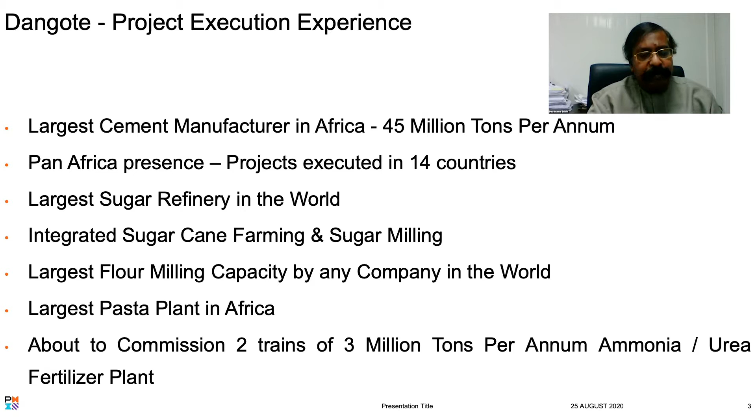Coming to the specific project in question, we are looking at the oil and gas projects we are executing at present, specifically the petroleum refinery. It is the largest single train petroleum refinery in the world with a capacity of 650,000 barrels per day, with an integrated petrochemical complex to produce 840,000 tons per annum of polypropylene. And we are already doing the initial conceptual work to add another 500,000 tons per annum of polyethylene.

In the same complex, we are also building the second largest ammonia urea fertilizer plant in the world with a capacity of 3 million tons per annum. The complex has an integrated power generation capacity of 555 megawatts, with 120 megawatts dedicated to the fertilizer end and the balance dedicated to the refinery.

This site is also going to be the terminal point for the largest subsea gas pipeline infrastructure in the world, with a length of 1,100 kilometers of subsea pipelines gathering gas up to 3 billion standard cubic feet of gas per day, and it terminates at the site with world-scale gas treatment plants.

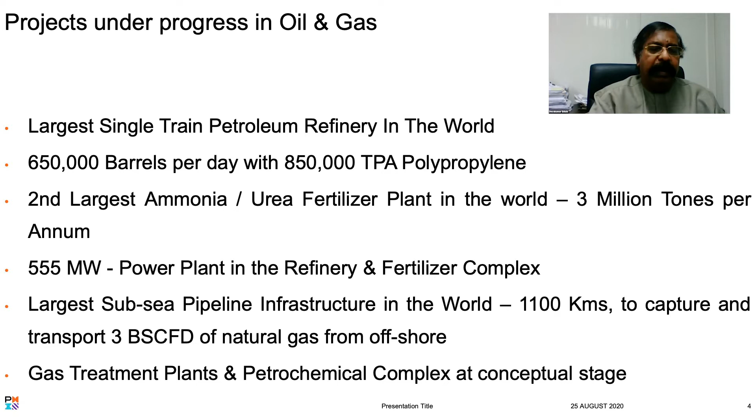So the project site comprises three key elements: the petroleum refinery and petrochemical complex, the gas treatment stations for 3 BCF of gas coming from the 1,100 kilometer subsea gas pipeline, and a 3 million ton per annum capacity integrated ammonia urea plant. For today's attention, our focus is primarily going to be on the petroleum refinery and the petrochemical complex.

I'll start with the business strategy of this project. The first strategy was that we should focus on producing the best quality product in the world so we can export the products to anywhere. So we straight away designed the refinery to produce Euro 5 quality products, so this product can be sold anywhere in Europe, US, any part of the world.

As you know, many refineries, even in Europe, are still not in a position to produce fully Euro 5 grade. So we have gone straight away to produce Euro 5 grade for 100% of our production, whether it's gasoline, diesel, or aviation jet, all Euro 5 grade. That was the first business strategy, so we will not be constrained to move the product to any part of the world to export, because it's a very large refinery, and we'll have to export quite a lot of our production outside the continent.

The second strategy was to have crude flexibility. Yes, the refinery is coming up in Nigeria, and Nigeria is a large oil producer, so normally the refineries would be tuned to utilize the Nigerian crude oil production. But we decided that being major investments, we should not again be constrained by the crude.

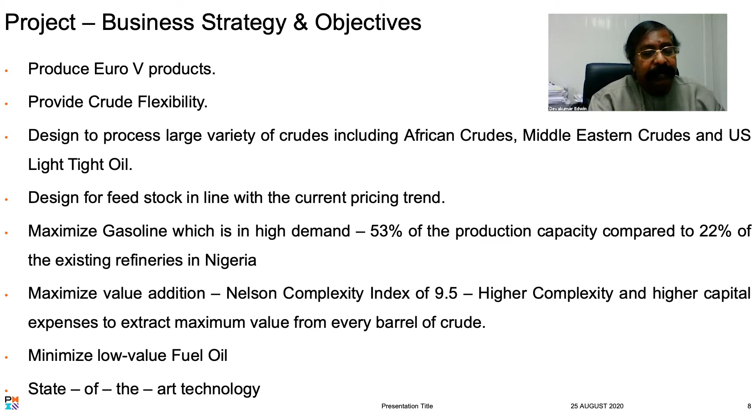And to give an executive summary about the refinery, we can meet 100% of the Nigerian requirements. In terms of all requirements, gasoline, diesel, aviation jet, kerosene, we can meet 100% of the requirements. And we will have surplus in each of these products for export. And as far as Nigeria is concerned, it creates an $11 billion per annum market for the Nigerian crude.

For Nigeria, US used to be the biggest market for the Nigerian crude. Then, as I explained earlier, US became self-sufficient. It started exporting a similar variety of crude. So Nigeria lost its biggest customer and market, and it was facing competition from LTO. US has already sent cargoes to India, which is another market for Nigerian crude. So the demand for the Nigerian crude was also facing a lot of pressure.

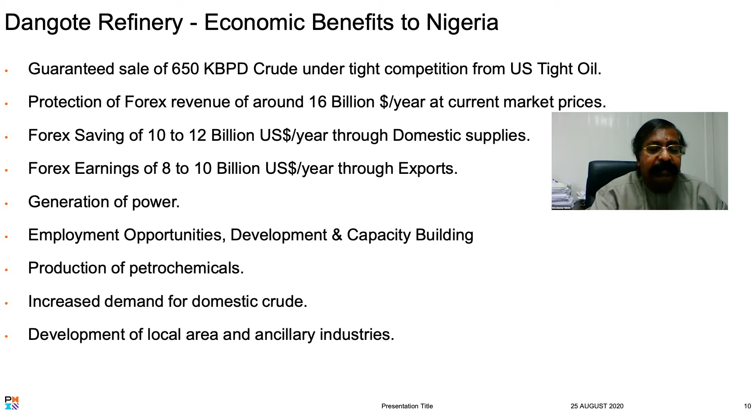So now it creates a ready market with huge potential. And apart from consuming a substantial quantity of Nigerian crude, because we are going to export a huge volume of liquid products, and because we are going to go for 100% import substitution, there is going to be an enormous foreign exchange savings for the country. It will be a minimum of almost $10 billion, if not more.

So the country is going to benefit a lot in terms of foreign exchange savings, and the currency, which has always been sliding down, can become stronger.

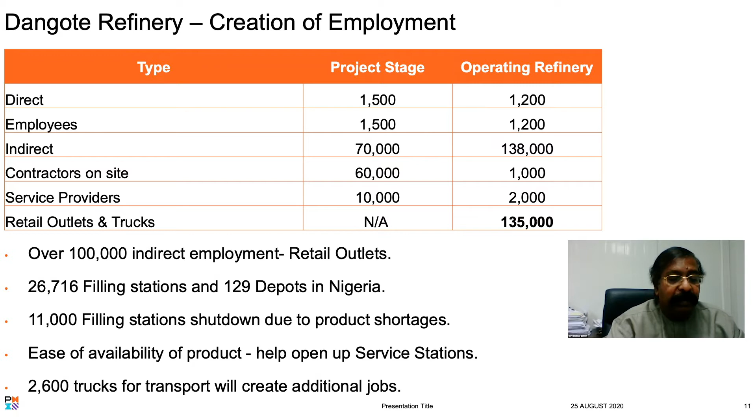And we have also designed marine infrastructure to receive the crude and to export the product. That was another part of the business strategy, you can say.

75% of our production can be evacuated through road, and 75% through sea. So we have 150% evacuation capacity with full flexibility, and we can take it to ports within Nigeria, West Africa, Central Africa, and to South America and Europe. So we have full flexibility in product evacuation.

I'll place a slide now to show you the production capacity for each product: gasoline, kerosene, jet, and diesel, and what is the consumption in Nigeria, and what is the surplus for exports. So this gives you a picture of the refinery's capacity as well as the quantum of products available for export.

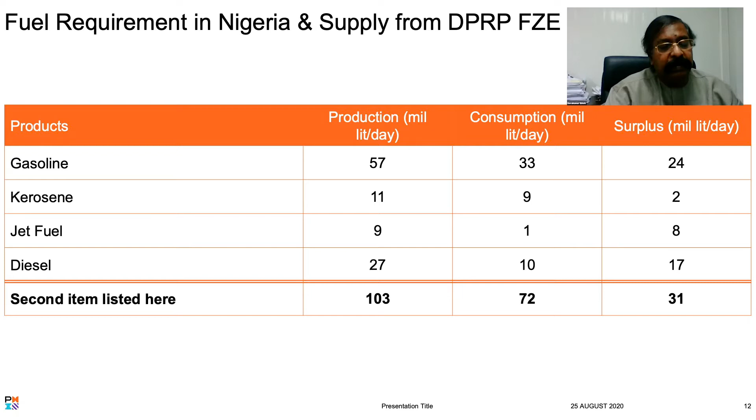And if you go through the next slide, you will see the various petrochemicals which this refinery is going to produce: polypropylene, polyethylene, carbon black feedstock, and sulfur.

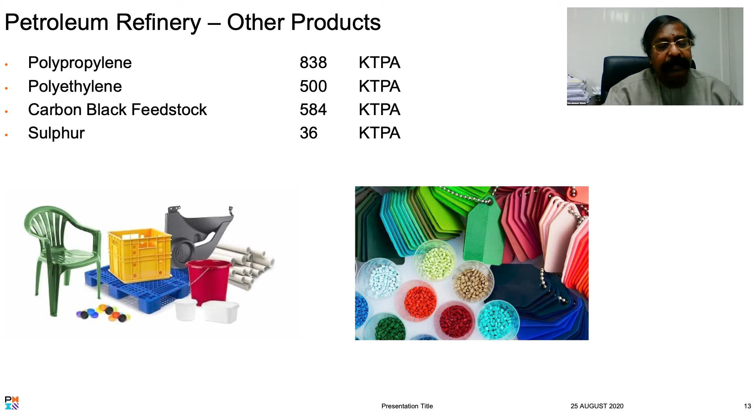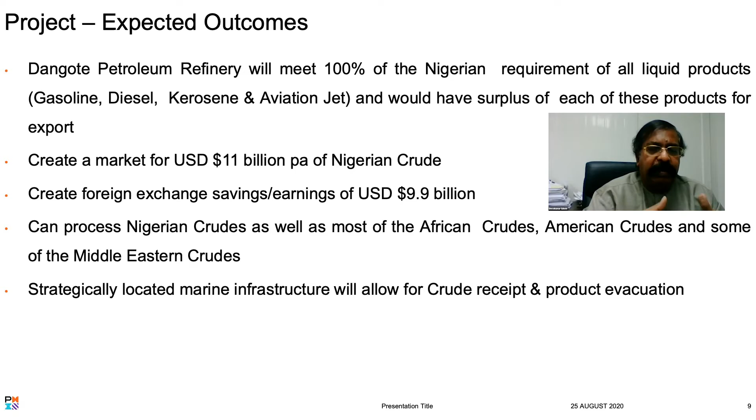Coming back to the petroleum refinery and its investments, there were a lot of investments which were not originally envisaged at the conceptual stage, which we had to invest.

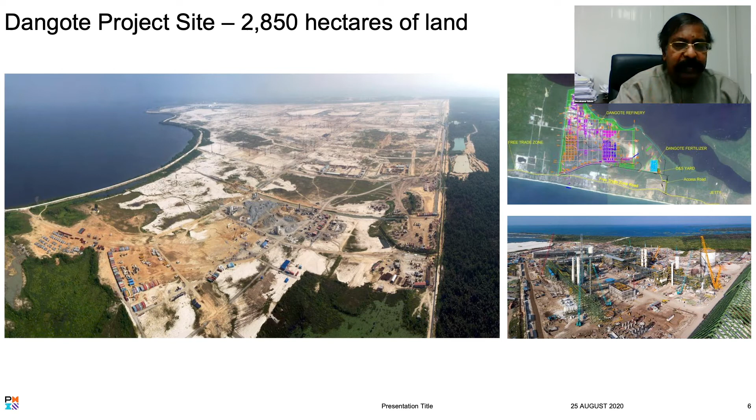When we bought the site and moved in, the site looked good, but when the initial investigation was done, we realized that 70% of the site was swamp, and the entire land had to be reclaimed. The swamp buggies available in the country were not adequate, so we had to import swamp buggies just to clear the swamps. And it was very bad soil which had to be reclaimed.

Before we started our civil works, we looked at it and realized our site was between the sea and the lagoon. We were concerned that with global warming, ocean levels could rise and our investment could be at threat.

So we decided to raise the entire height of the land. It's 2,850 hectares of land, not a small piece, raised by 1.5 meters height. So we needed to pump in 65 million cubic meters of sand.

Normally, pumping in 65 million cubic meters of sand takes a very long period of time. So we had to actually go and hire the world's largest dredger, the second largest dredger, and the 10th largest dredger — three dredgers to come and simultaneously pump. Still, it took us more than a year, close to a year and a half, and it cost us about 300 million euros to elevate the height of the site by 1.5 meters. So this was another unenvisaged expense we had to face.

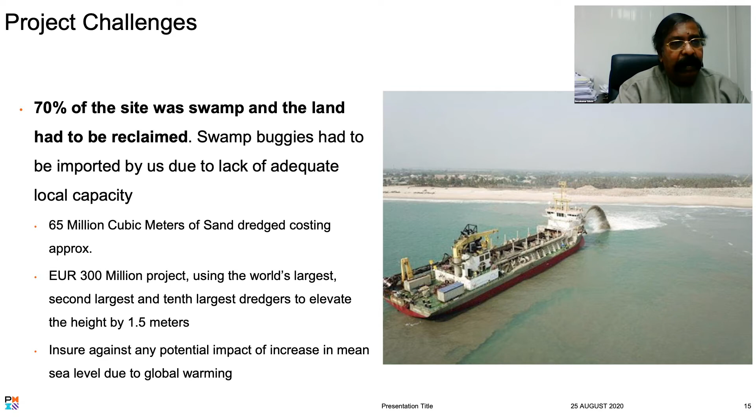Then we wanted to go in for construction, starting with civil construction. The biggest civil contractors in Nigeria all said they could not even handle one-tenth of the civil works that were supposed to be executed on the site. They didn't have the capacity, they didn't have the equipment. So we had to buy equipment ourselves.

We bought 1,233 construction equipment units on our own so that we could meet the capacities here. That was another major investment in terms of dozers, excavators, compactors, backhoes, front-end loaders, dumpers, and tippers. So this was an unenvisaged expense of 1,233 construction equipment units, but it has also equipped us today to become a major civil construction company on our own.

This also included mechanical construction equipment, because when we decided to go for the mechanical construction stage, the contractor said this is a large project and we have to ship all our equipment into Nigeria and ship it back. We realized the cost of shipping equipment back and forth, as well as the way contractors were trying to depreciate the cost of their equipment, meant it was good to buy our own equipment so we'd have brand new equipment that could work without much mechanical failure and give us better productivity. So we had to buy more than 300 cranes of various capacities.

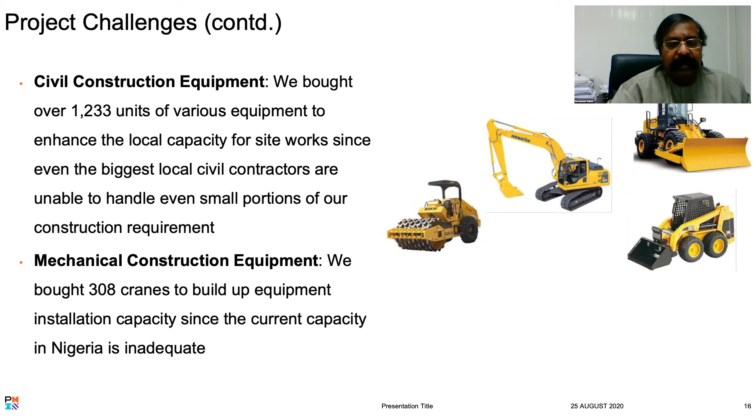When we looked at the concrete quantities, we realized the concrete production capacity available in the country was abysmal. So we had to invest in ready-mix concrete production capacity, including transit mixers and concrete pumps, to manage 13 million cubic meters of concrete capacity per annum. We invested in a lot of batching plants, more than 200 transit mixers, more than 80 concrete pumps.

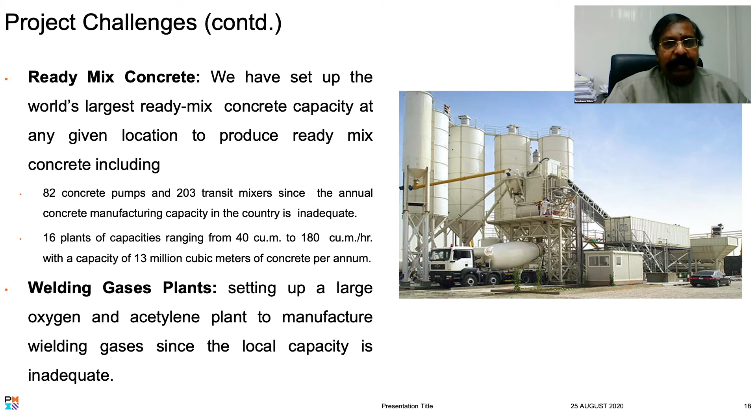That was another unenvisaged expense, but it gave us a huge capacity to produce ready-mix concrete. We also had to invest in a 10 million tons per annum stone quarry, because the volume of aggregate required to produce concrete within this short span of time was large, and the aggregate production capacity in the country was practically next to nothing. So all these kinds of investments were not originally envisaged, but they all added up.

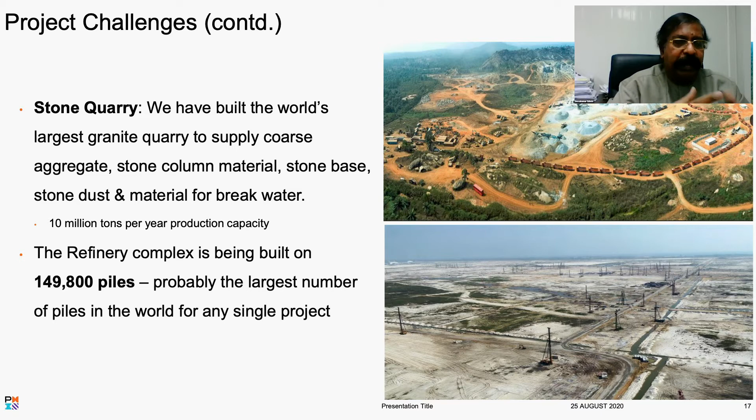We also had to develop a port on our own. The Nigerian ports are all designed with quays to handle 2.5 tons per square meter load, but our equipment was coming with more than 20 tons per square meter load. So we had to design a roll-on roll-off jetty with quays capable of handling 25 tons per square meter load, so we could bring the over-dimensional cargo directly to the site. We had to construct the quay very close to the site, which was an additional unexpected cost.

We originally built two quays, and now we've built two more, and are in the process of building another two. We'll end up with a port complex of 6 quays - two to handle Panamax vessels, which we can use to export our urea as well as the petrochemicals we're going to produce, and today we're using it to bring in containers.

Container vessels are coming in straight to our site, along with the roll-on roll-off jetty to handle the over-dimensional cargoes. We're also building two more quays to handle liquid cargoes, so we can load smaller vessels where required and take the cargo out.

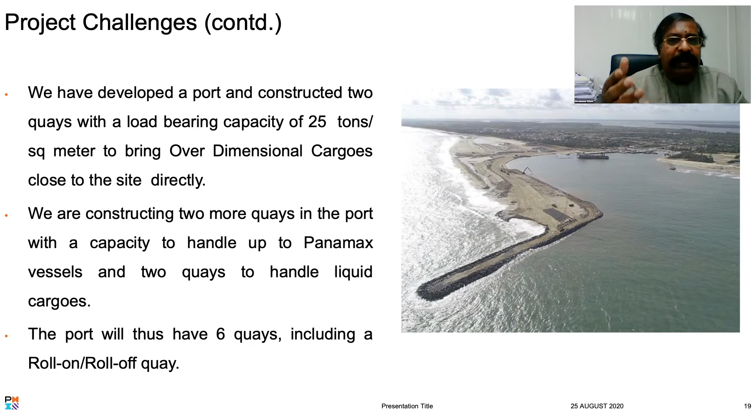With this kind of large complex being built, we realized we would have to bring in a lot of workmen from abroad. So we built a complex to accommodate 50,000 workmen, including air conditioning, water treatment and distribution, power generation with 25 megawatts capacity, distribution, and street lights. It was a big complex, including sewage treatment, evacuation, solid waste management - a small city for 50,000 people.

We had to invest in that, but some of these investments have really helped us. Without the stone quarry and batching plant capacity, this project would have never seen the light of day. The same goes for the oxygen and welding gases plants, and the construction equipment.

Though it increased our capital cost, we've been able to easily accelerate the work whenever required because we had the equipment on hand.

The 50,000-person housing complex helped us during the coronavirus period. We could bring all the people inside, test them, and accommodate them there - they stayed on site all the time. We already had arrangements, even with the canteen, to produce food and distribute it to the people. Everyone was inside, pre-tested and accommodated, so there was no way the virus could get in, and at the same time those inside the site could continue with our construction work.

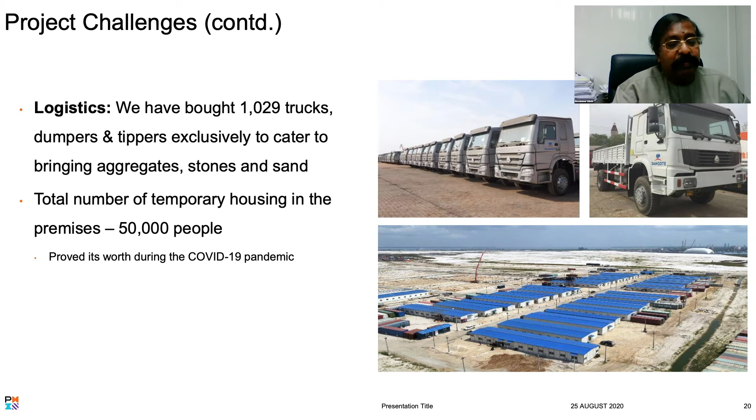And it's not just the piling or the major works we are executing, even smaller things like roads. We have to do 112 kilometers of concrete roads, 200 kilometers of concrete drains. When you talk about drains, some of them are as wide as 18 meters and up to 2 meters deep. They are big canals. Because of the land and the rainfall in this area, we have to construct major canals like drains to evacuate the water. So even the construction activity is quite large.

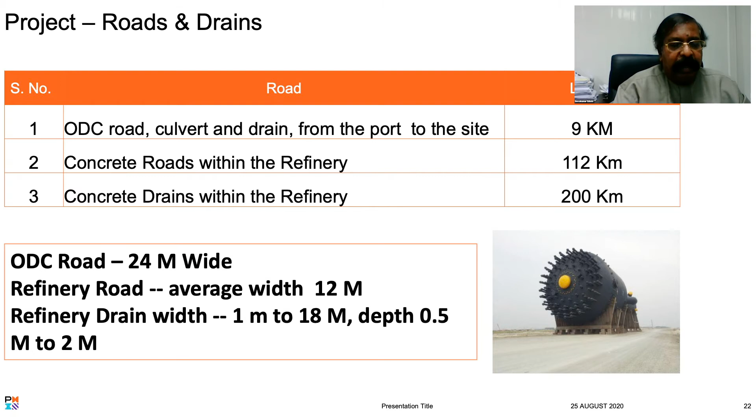And if you look at the tank farm capacity, we are building 177 tanks to store a huge capacity of our crude as well as our products. And as I said, we can evacuate 150% of our production.

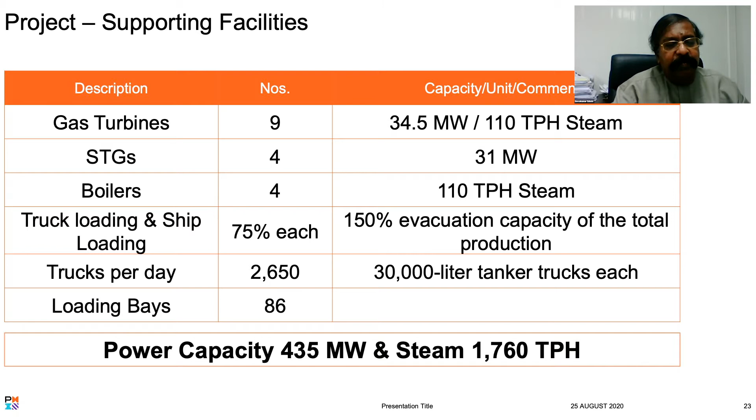I talked about the road evacuation. I can load up to 2,650 tankers a day of 30,000 liters capacity. We have 86 loading bays within the refinery. And when it comes to marine evacuation, we can evacuate 75% of our production. We have actually built in almost 120 kilometers of subsea pipeline.

To receive crude, we have two pipelines of 48-inch diameter concrete coated pipes. And to evacuate the product, we have three pipelines - a 24-inch pipeline to evacuate gasoline. We can evacuate aviation jet fuel, we can also evacuate diesel. And we also have facility to receive ethanol if it is required.

So we invested in 5 single point mooring buoys, 5 SPMs - 2 for the crude, 3 for the products. We can receive crude with the largest vessel available in the world - we can receive VLCCs, we can receive ULCCs too. And product we can evacuate through Suezmax vessels, which is normally the largest, which is LR2, the biggest vessels which normally handle the products. So we have built in a lot of flexibility at the marine facility.

It's a major investment, but it gives us flexibility because I can offload the crude at the rate of 80,000 barrels per hour. So I can bring a ULCC and evacuate it within a day. And I can load 75,000 barrels per hour of product. I can bring a Suezmax and load it within a day. So instead of vessels coming in, waiting, or incurring demurrage, I will even gain in terms of dispatch because of the very high product loading capacity and very high crude evacuation capacity.

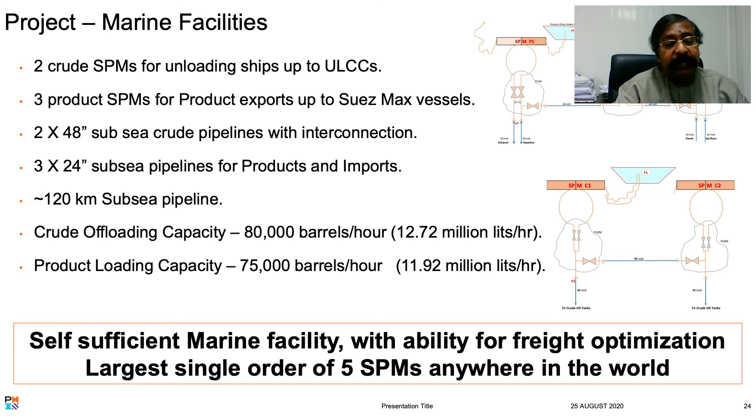So these are other strategic investments we made in the marine facilities. As I said, we have a total 177 tanks to handle 4.74 billion liters of various crude and products. The crude can store up to 2 billion liters, and in the case of products, we can store 600 million liters of gasoline, 200 million liters of aviation jet, 200 million liters of kerosene, and 340 million liters of diesel. Actually, if you look at it, the diesel, we can store 34 days of the country's requirement.

Gasoline, we can store more than 11 days of the country's requirement, and kerosene and aviation jet fuel to a much larger extent. So the facility we are building here will be almost like a strategic reserve for the country.

Today in Nigeria, at any given time there will be 20 vessels waiting outside in the fairway buoy to offload, because the existing tank capacity is so limited and they do not want to run out of products in the country. The discharging capacity is quite low and the storage capacity is also limited. So now with this high discharge capacity, loading capacity, and storage capacity, we'll be providing a good service to the country.

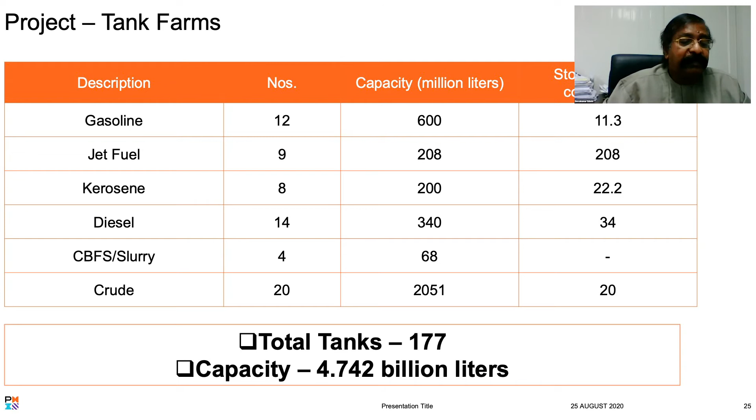And now we'll come to the construction strategy. As I said, we decided to take the EPC role on us.

As a primary contracting strategy, we decided to go for vertical contractors to reduce the coordination efforts. A vertical contractor can do the civil, mechanical, electrical, and instrumentation sections. Otherwise, if you bring in separate civil, mechanical, electrical, and instrumentation contractors, yes, they are highly specialized in their field and you have wider flexibility to bring in people, and probably get a better cost when negotiating. But there will be a major problem on interfacing, and each contractor can try to pass responsibility to the other, saying the fronts are not available. Ultimately we'll be suffering because of delays.

So to avoid this interfacing impact and to reduce the coordination efforts, we decided to go for a vertical contracting strategy - end-to-end, from civil to instrumentation, completion, mechanical completion, and testing. That is how we gave out the packages, section-wise.

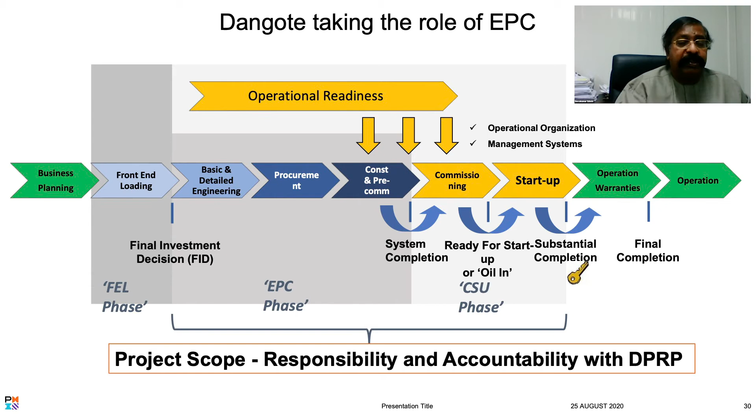And then in the case of procurement, we centralized it and limited it to a few people handling it, which helped us in the decision-making process. There was a large supporting team, of course, but the whole decision-making process involved about 3 or 4 people. So decisions were made very fast, and that helped us not only to negotiate and squeeze out good pricing, but also to take decisions quickly.

Then, as I explained earlier, we had 2,550 construction equipment. We built our own port so that we could save on logistics. Take the case of the port facility - even to bring in containers, the port facility in Lagos is limited.

You have 2 ports in Lagos, Apapa and Tin Can, which handle more than 80% of the requirement for the whole country - they are the biggest ports. But goods can come to the port and lie there for anywhere between 3 to 6 months because of port congestion and the bad road network. Evacuating goods out of the port is a real nightmare.

We too faced part of this challenge before our own jetty was ready. For the over-dimensional cargoes, we went ahead and built our Ro-Ro jetty, so that was quite easy. But the container quays were built subsequently, when we realized the major challenge we were facing with existing ports. So that actually drove us to build and expand the port, and that is also now helping us reduce our costs.

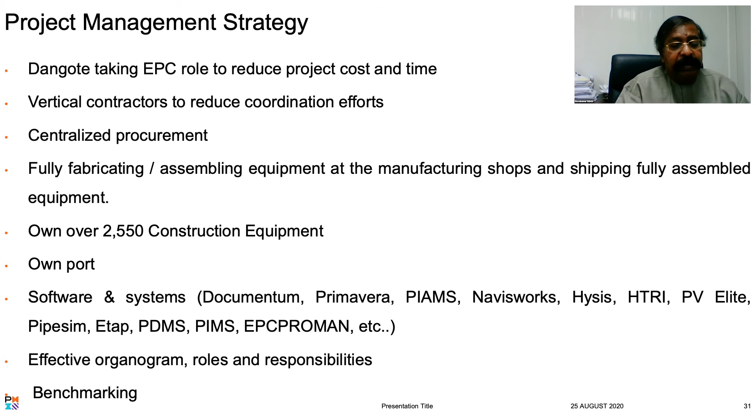And we have, of course, the operational warranties from the licensors and from the equipment suppliers. So this is how we divided the responsibility under our EPC role. And we have the project management, with the licensor also playing a role in the overall project management.

We are also bringing in the detailed engineering contractor to have oversight. Construction management is exclusively ourselves with support. The detail engineering contractor is also engaged to have third party oversight over our own construction management, to have an independent check. And pre-commissioning will be done by us and the licensors, of course.

We went in for the principal licensor, UOP, which is a Honeywell subsidiary. Of course we have also got licenses from ExxonMobil, DuPont, INEOS and other companies. But we put UOP as the management licensor to take up more responsibility from the other licensors too.

So they too are playing a role in the overall project management. For example, they vet all the detail engineering and certify it. So we have built in some checks and balances. Though we are doing the EPC, we have independent contractors also having oversight to ensure there are no gaps.

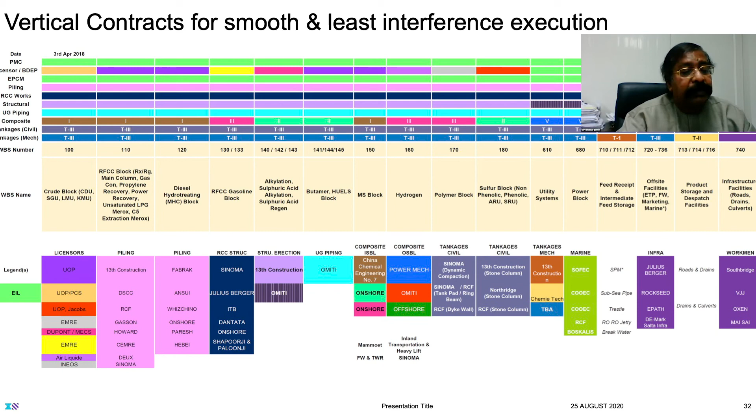Coming back to project management per se, we are using Primavera for project management, scheduling, resource management, risk analysis, and opportunity management. And we are using Documentum for documentation management because we have more than 105,000 engineering drawings and thousands of documents, so all of that has to be stored using an elaborate document management system.

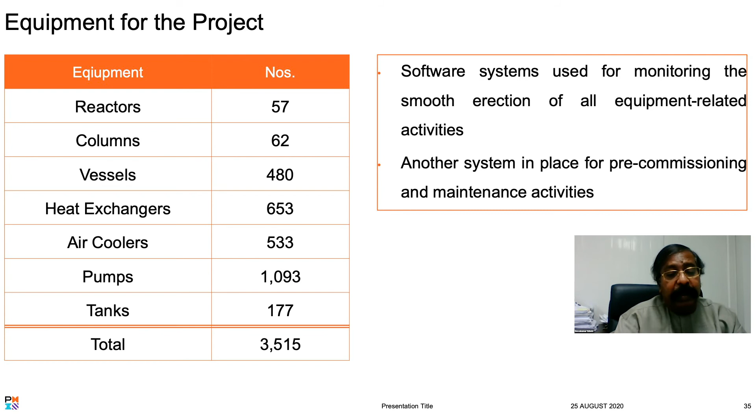And we are having 3,500 equipment coming to the site, so we are using software for monitoring the smooth erection of all the equipment and the equipment related activities, which is also very helpful for us to manage the erection.

And we have the over-dimensional cargoes. As I said, we built in this facility which is helping us manage the construction, the port facility. We took a strategic decision not to bring in small pieces of equipment and assemble them on site. Instead, we decided to bring in pre-built or pre-assembled equipment.

The crude column came as a single piece, with a height of 94 meters and a weight of 2,300 tons. The C3 splitter came as a single piece, 102 meters long and 2,110 tons in weight. And the reactor regenerator came with a weight of 2,700 tons and a huge 21-meter diameter piece.

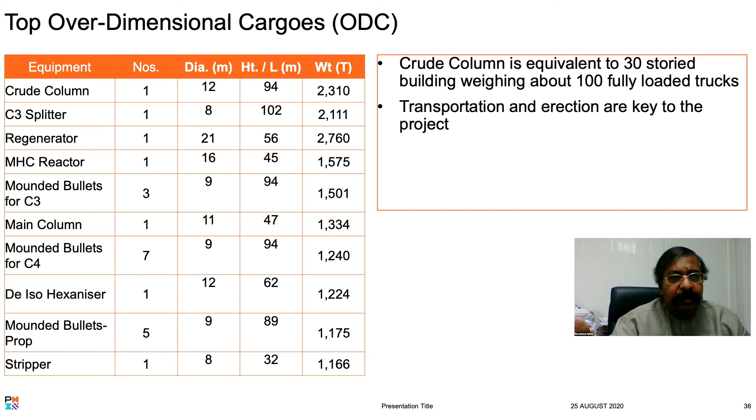So we can see that many of the equipment, quite a lot are weighing more than 1,000 tons, and 3 equipment weigh more than 2,000 tons. And at least 4 or 5 equipment have a length of 90 meters and above. So these are huge equipment we brought as a single piece.

Yes, we had to spend a lot of money on freight, and we had shipping challenges, logistics challenges, to bring them to the site. But the construction time at the site was cut down substantially because they were already shop fabricated and tested.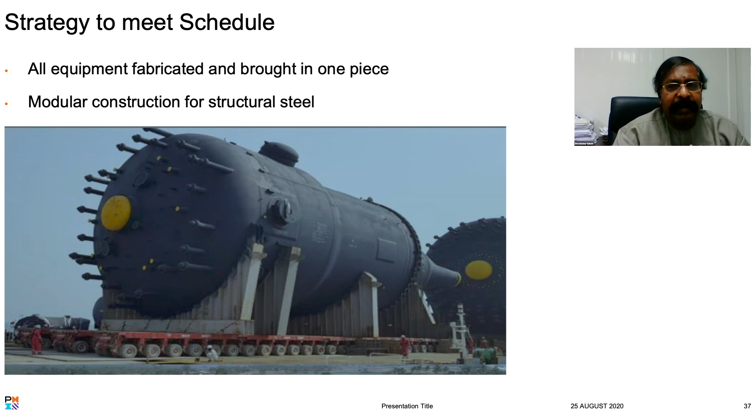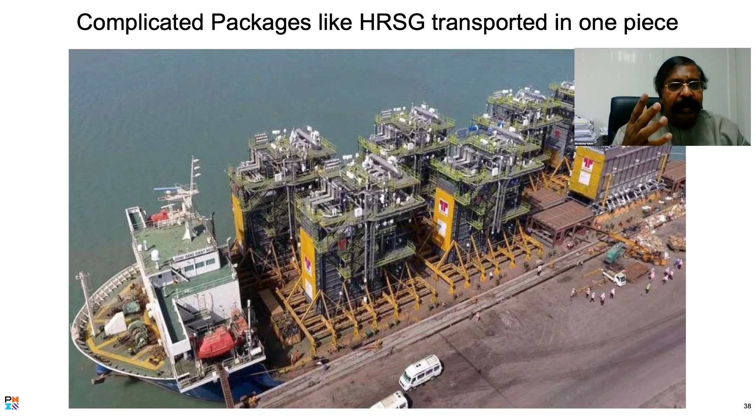And again for other equipment too, even things like the heaters, the HRSGs, heat recovery steam generators, they all came pre-assembled, including, for a multi-story building, structures, equipment, piping, cabling, instrumentation, everything done and pre-tested at their facilities. It was the whole piece of equipment, say 5 or 6 floor heights with different floors, and the whole thing came as an assembled single piece to the site.

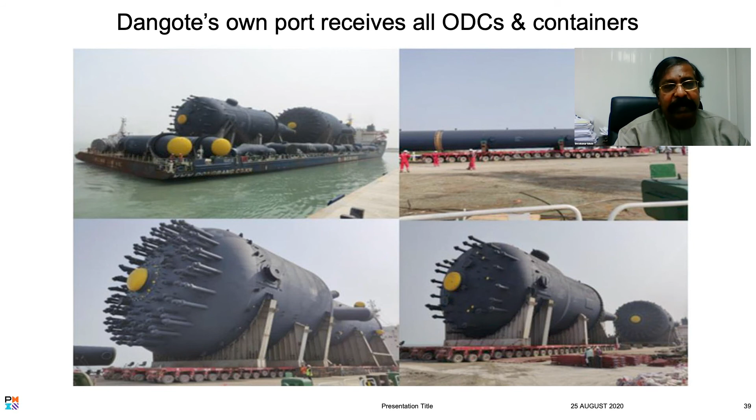So this has helped us enormously in minimizing construction mistakes and minimizing the construction time at the site, while maximizing the productivity.

It's a large site, as I explained. So if you look at it, between the structural steel, steel plates and rebars, we are bringing in almost 600,000 tons of steel, 110 kilometers of handrails, 2,600 kilometers of piping, 18,000 kilometers of cabling, 21.6 million inch-meters of pipe fitting, and 6.9 million inch-diameter of welding.

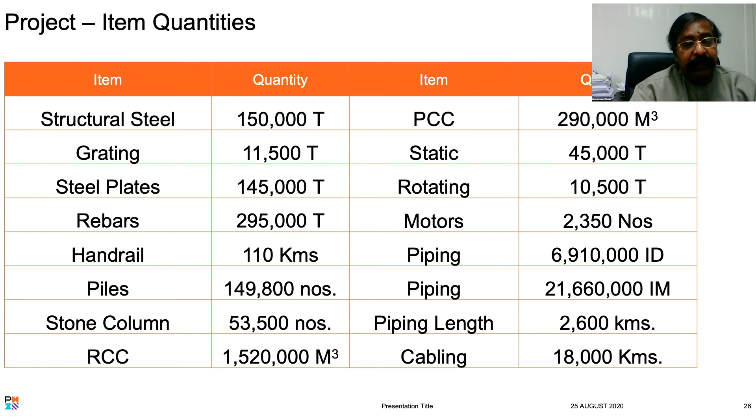So the work at the site is also, in spite of the pre-assembled equipment we have brought, still enormous. And we are using 1 million tons of cement for construction, 40,000 containers of material, and 1 million freight tons of break bulk cargo. So the project size is still quite enormous.

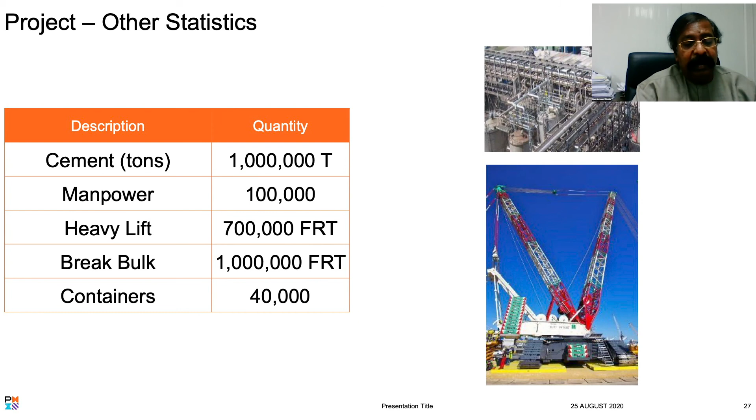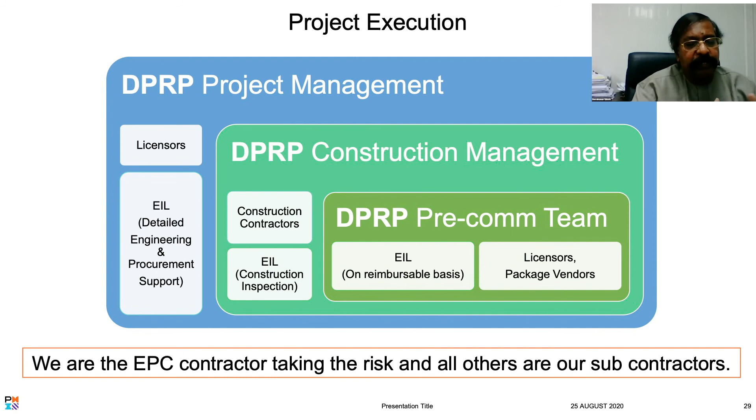And the management setup we have built in, as I explained earlier, the construction strategy we have done, and the usage of various software to manage the construction, has helped us to manage this enormous project successfully so far.

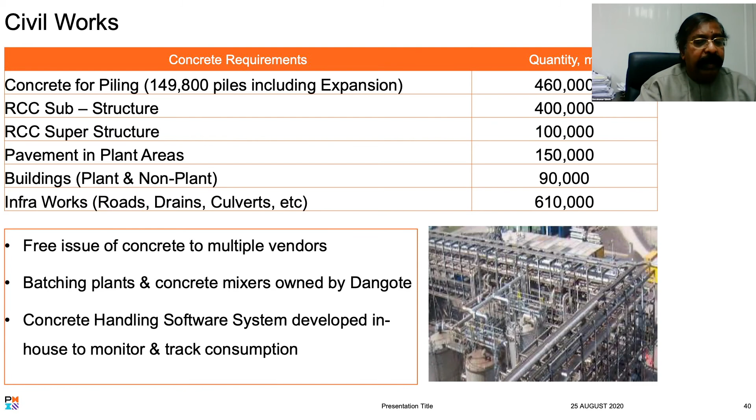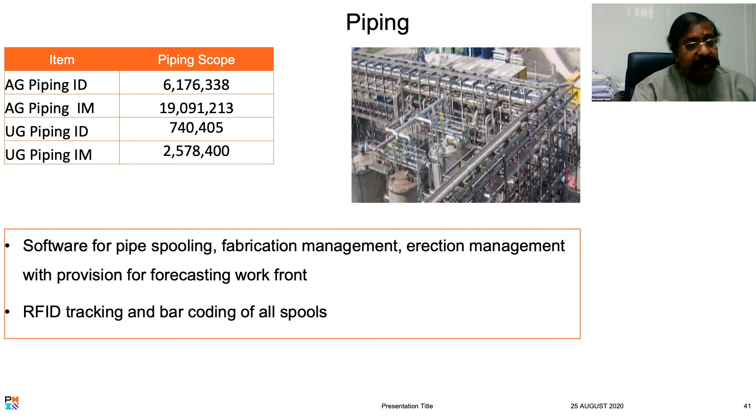As I said, the concrete quantities too is enormous, and we are using a separate software for concrete handling, developed in-house, to monitor and track the consumption. We also use software for pipe spooling, fabrication management, and erection management. All material coming into the site, every pipe spool, every flange, every material, we track through RFID codes and barcoding. The use of technology, not just software alone, RFID systems and other management systems, is helping us successfully manage this project.

At the peak load, we'll be having 100,000 workmen at the site, and we have accommodation for 50,000 people within the site. Their attendance management, their movement management, everything is monitored through software. The electrical packages, instrumentation packages, and warehouse management packages are all managed and monitored through different software packages, which has helped us a lot.

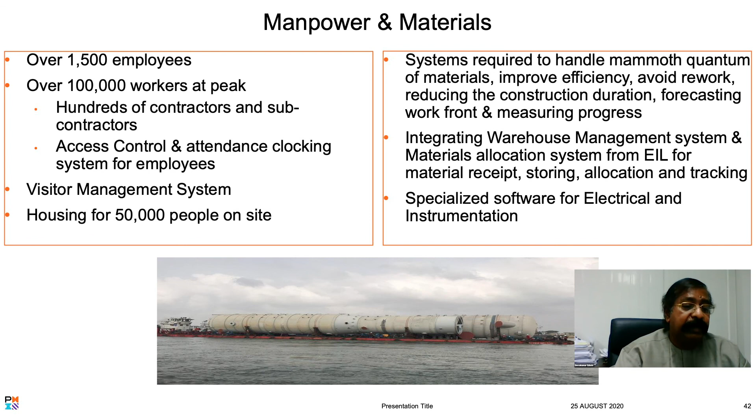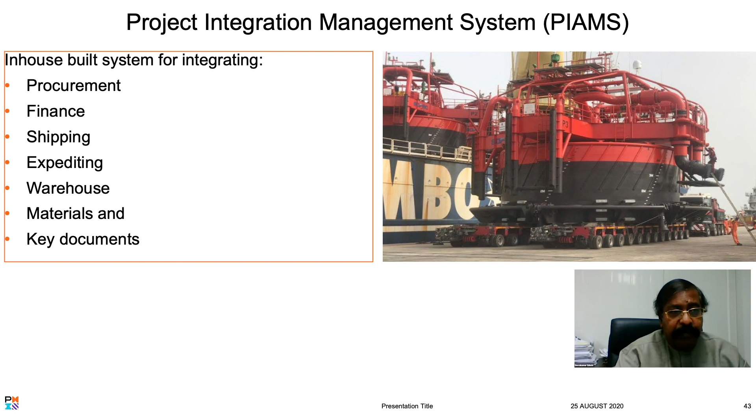We also developed another in-house package for project integration management systems, which helps us keep track and integrate procurement, finance, shipping and expediting, warehouse and materials management, and integrated document management. That software package has helped us a lot, giving complete oversight and tracking of the project.

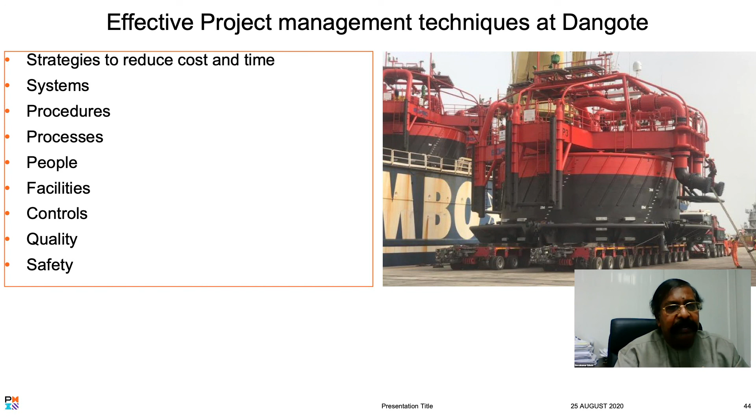We have adopted various strategies to reduce cost and time through various systems, procedures, processes, and controls. I think I've covered reasonably well the basics of the project, the business strategy, the construction strategy, what drove us to do the project ourselves by EPC, and how we are handling various elements of construction through technology. Though totally new for us, taking up a project of this enormous scale as an EPC contractor is a real challenge, especially in a country with a lot of operational constraints.

We have learned lessons and moved forward. As I said, we learned that even bringing containers through the port could be a major challenge, so we were driven to construct our own ports. But so far our planning has helped—we could plan ahead and build facilities for industrial gases, ready-mix concrete production, and aggregate production. If we had not envisaged these challenges ahead of time and invested, the project would have gone out of control.

Also, our investment in construction equipment, housing, and accommodation helped in ways we didn't expect, like with COVID. We didn't expect it when we invested in those houses. Many people advised us, why are you investing in 50,000 houses, you'll never use them. We thought if a situation came up where I had to accelerate the project and bring in a lot of people, we should invest—treat it as a kind of insurance investment. That helped us. Some things we planned ahead and did, some we invested as insurance, and it helped.